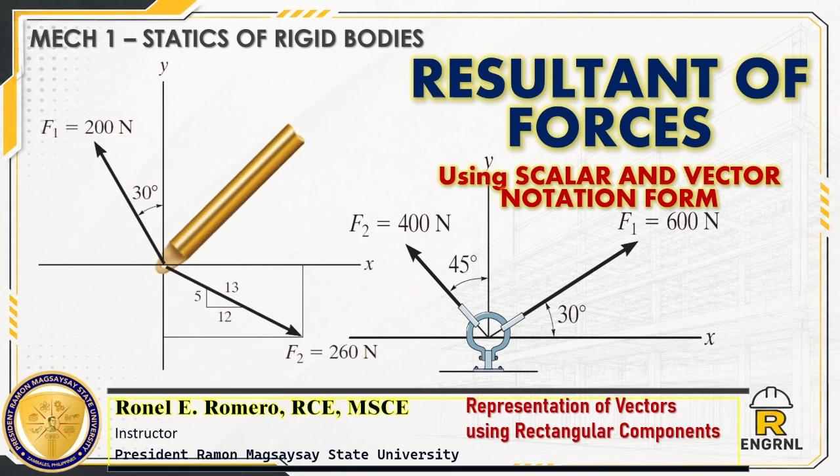In two-dimensional system, familiar sa inyo yung x and y axis. And there's a force, diagonal, na kapag kinuha natin yung rectangular components is Fx and Fy. So, that is in a scalar. Fx is scalar, Fy is scalar. But if direction is needed, Fx is going to the right in x axis, Fy is going up in y axis.

So, kapag sinulat natin siya in vector form, ginagamitan na natin to nung tinatawag nating unit vectors. The unit vector is dimensionless na may magnitude ng 1. So, it represents also direction. Like, i is going to the x direction, j is going to the y direction, and k hat is going to the z direction if it is in 3-dimensional.

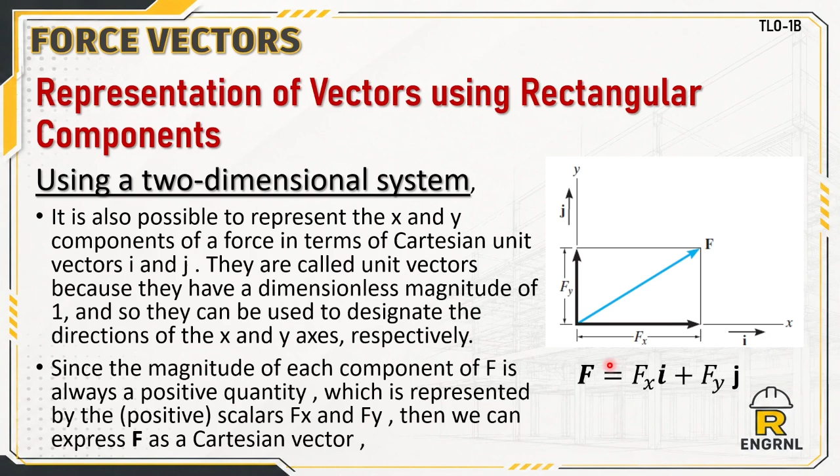Now, since these are positive components as vectors, scalars Fx and Fy can be rewritten and apply the unit vector to become Cartesian vector. So, ito pong F na naka-bold type is equal to the scalar Fx times unit vector i plus Fy unit vector j. This is called the Cartesian vector form. Okay? So, gets na natin yan.

Ngayon, we can also do this in kahit ilang forces. So, how to write the vectors, the resultant vectors, and its components. If we are tasked to get the Cartesian vector form of F1, i-resolve lang natin sa components. F1x, scalar yan. F1y, scalar yan. Pag nilagay natin ng i and j, magiging vector na siya. Ganun din yung sense sa F2. Susundan natin yung direction niya.

Kapag first quadrant, positive x, positive y. Second quadrant, positive y, negative x. Third quadrant, negative x, negative y. And last quadrant, positive x, negative y. So, these are the patterns. So, we have a Cartesian vector form for F1, F2, and F3. So, let's proceed with the vector resultant.

Paano nga ba natin kinukuha yung vector resultant? Ang kagandahan sa vector notation forms is nare-represent siya ng organized. Kala natin mahirap to pero madali lang siya, basta sundan lang natin yung pattern. So, FR represents the resultant, pwede rin natin isulat yung R. This is the vector addition: F1 plus F2 plus F3. Tandaan natin, vectors na sila. Tapos, ito yung mga values ng mga yan.

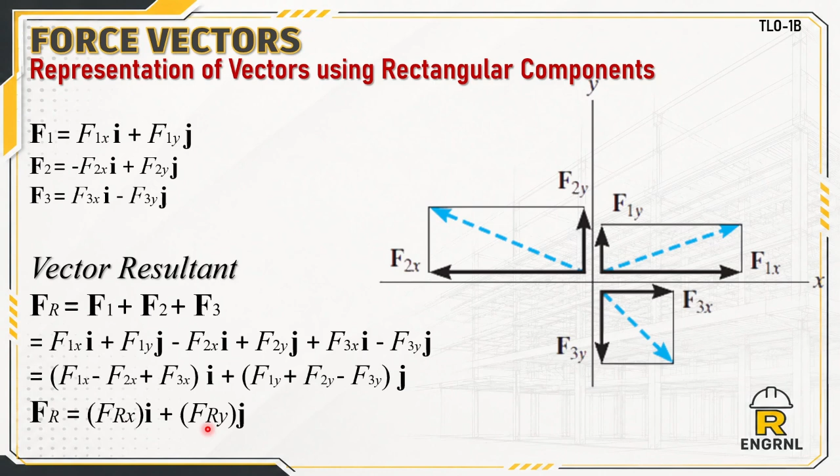And later on, using scalar method, ini-square root din natin to: square root of FRx squared plus FRy squared. So, we do the scalar solution. Parang nadodoble nga, parang nagkakaroon ka ng ganitong arrangement before you do the conventional scalar method. You will appreciate the vector solution if we are in the three-dimensional system.

So, in scalar form, yung pagkuha ng resultant is using this Pythagorean concept. And the direction of the resultant, ginagamit natin yung arctangent, the vertical component over the horizontal component. So, it shows the direction in a rectangular or parallelogram way. Kaya na-formulate si arctan kasi nga opposite over adjacent po.

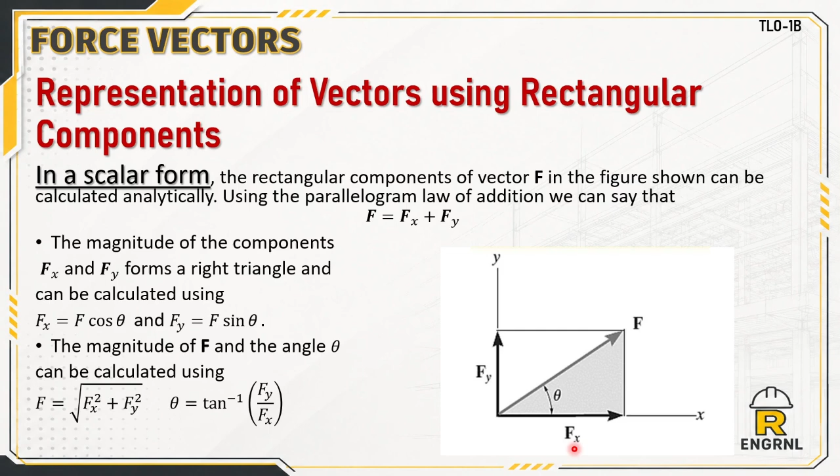Let's try an example para mapakita ko sa inyo paano natin sinusolve yung ganong concept. So, we are tasked to get the x and y components of the force F1 and F2. And pansinin natin na it is in the concurrent force system, coplanar also. And dito sa F1 is given na naka-angle siya. Sa F2 naman is naka-slope.

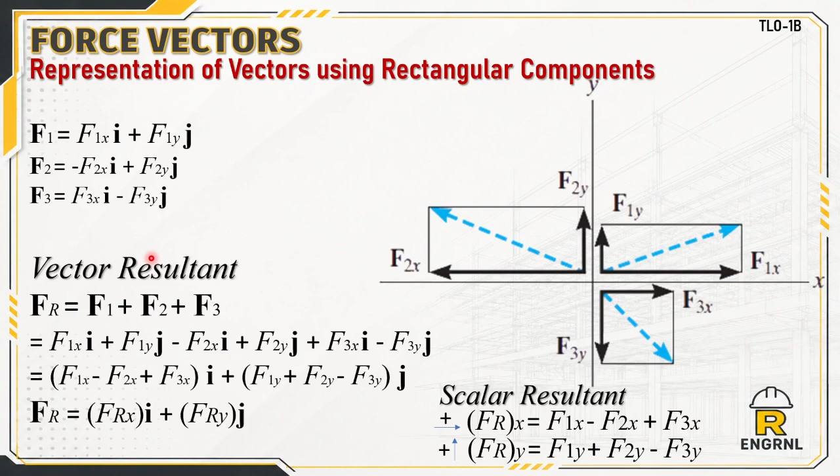So, siguro nung physics nyo, na-encounter nyo na yung treat sa mga ganito pong direction. It's just getting the hypotenuse of the small triangle na ang rise is 5, run is 12. So, we have 5 squared plus 12 squared, square root, we have 13. So, as we express that into y and x component, we are also tasked to express each force in a Cartesian vector form. Yung ginawa natin kanina dito. I-express natin siya ng ganito.

So, let's try to get first the components using the scalar notation. Gawin natin mabilis, alam niyo na to. Get the x component of F1 and that is opposite over hypotenuse. So, we can do 200 sine 30 and we get negative kasi going to the negative x direction siya. We can also rewrite that as 100 Newton going to the left. Ito yung talagang pwede nating i-sagot. Kailangan may direction.

So, F1y is going up. And in the sense of this angle, adjacent naman siya. Yung F1y is adjacent to the angle. So, we have 200 cosine 30. We have 173 newtons going up. Tapos na po, yan yung components ng F1. Now, we get F2. The x component of F2 is obviously going to the right, so we expect that to be positive.

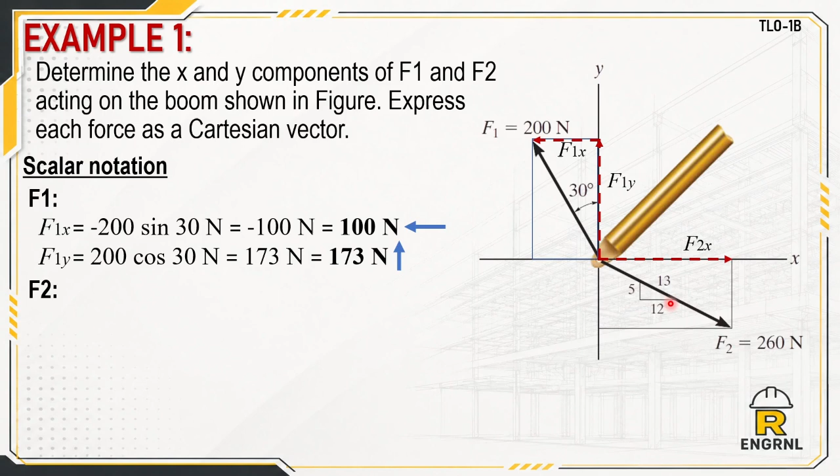And ang method na ginagawa natin dito kapag may slope, we can do the similar triangles. Tandaan nyo na yung force F2 ay may rectangular component. So, it will also form a right triangle that is similar to this small triangle. So, makukuha natin F2x, which is similar to 12. Kaya, F2x is equal to 12. And yung F2 na hypotenuse is similar to 13, which is given. So, ganyan yung ginagawa natin.

And then we do the, ano tawag dito? Cross multiplication. O, di ba? Dali lang yan. Ilagay nyo na going to the right siya. And we do the same manner sa F2y. Cross multiply, and we have this. So, 100 newtons. Alam nyo naman na pababa siya because of the direction of the force on the fourth quadrant. Tapos na tayo sa pagkuha ng x and y components ng F1 and F2. That is your scalar notation. Diyan kayo pamilyar.

Tapos pag pinakuha pa sa inyo is resultant of F1 and F2, ang gagawin nyo na lang is square root ng lahat ng x components and y components. And pag pinakuha pa yung direction from positive x-axis, gagawin nyo na yung arctangent. Nung pinag-aralan natin last time, we do solutions using parallelogram law, triangle force. So, this is another way. Nakikita natin yung mga different ways. Now, hindi naman resultant yung pinapahanap dito. So, Cartesian vector form muna. Isulat natin siya in Cartesian vector form.

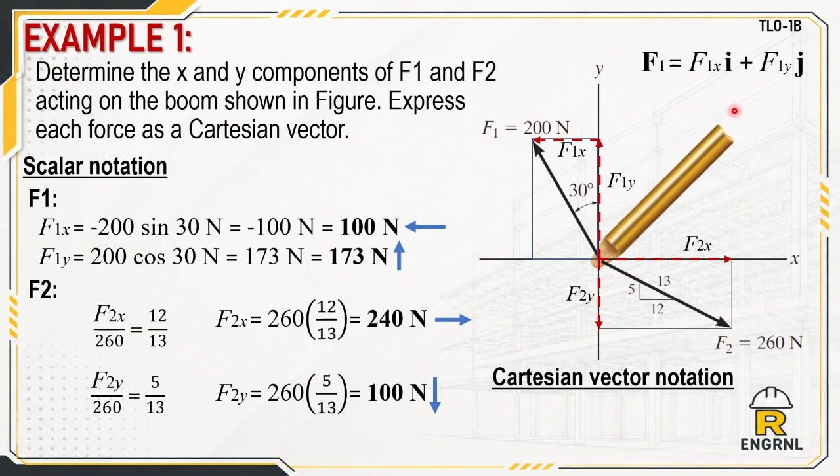Since ginawa na natin yung F1x, we have 100. But we will also write its real sign or direction. Negative naman talaga siya, so isusulat natin siya ng negative 100. Tapos, yung F1y is 173. Isulat nyo lang siya dyan. Sa ganitong form natin isusulat. That's the answer. Lagay din natin yung Newton, yung ating unit of measurement. Finally, we have F2. Dalawang direction lang naman tayo, i and j. So, we have positive 240. And sa F2y is negative 100.

So, kagandahan again ng vector notation, nasusulat natin siya on an organized form. If we are tasked to get the resultant using the vector notation, gagawin mo pa rin yung sa scalar, yung square root of negative 100 plus 240 squared. I mean, you will add algebraically yung negative 100 plus 240, i, and then j. Sa next example, matutuloy natin yan. So far, ito po yung ating part 1. So, let's proceed with the next one.